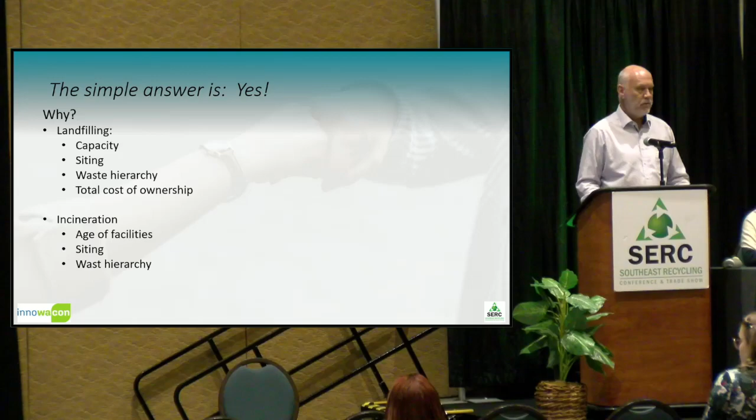Also the waste hierarchy, you don't want to incinerate if you can do other things with it, like recycle. And NIMBY, not in my backyard, everyone knows that. No one wants an incineration stack. And another acronym, I didn't put it on this slide, it's called NIMTOO. Do you know what that is? Well, that's for the politicians here. That's not in my term of office. I'm sure you can think what that really means.

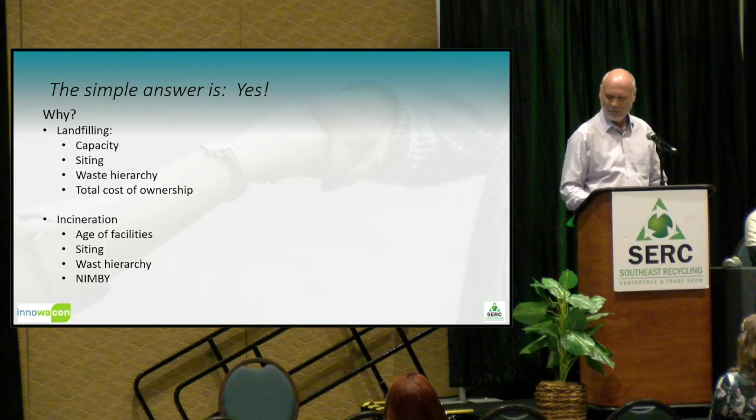Everyone's looking for a tried and proven alternative. The answer to this is you have to answer all these questions we were just asking before. What current sustainable future product is there that can take all this material and recycle it and convert it? What technologies are out there, available, working, tried and proven? We don't want any pie in the sky, great idea technology that might work, we think. That doesn't fly here. What do I do with my organics, my garbage, the waste, the nice juicy stuff?

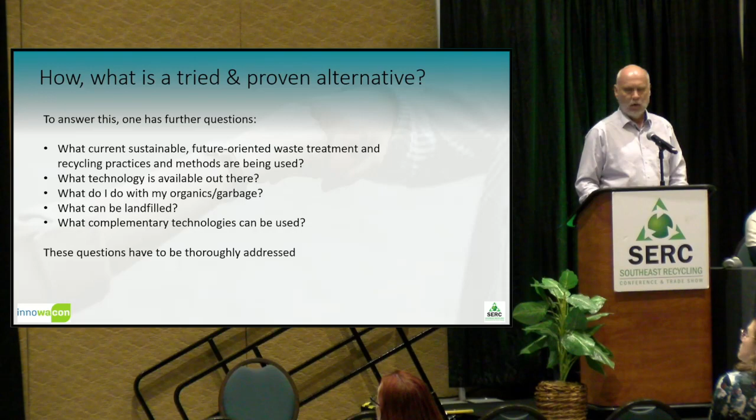What can be landfilled? And what complementary technologies can be used along with this technology? All these questions have to be thoroughly addressed. And ideally, you want a complete solution that'll take care of everything, combining the collection and waste and recycling centers together, when you do that all together, working with them, and a very sustainable waste process itself.

You just can't have something that's going to use up a whole lot of energy, a lot of space, emissions into the air, water, ground, etc. It has to recycle. You try to get the most energy, most recyclates out of the household waste, MSW, that is possible, and only dispose of certain things in a landfill that you can't do any other way. It should incorporate complementary technologies that could enhance it, and it should be BAT.

Who knows BAT? Best available technology. Should be that, not just state of the art. State of the art kind of stays along the timeline and doesn't follow. BAT always moves with the time. You're always adjusting, making the technology better as time goes on.

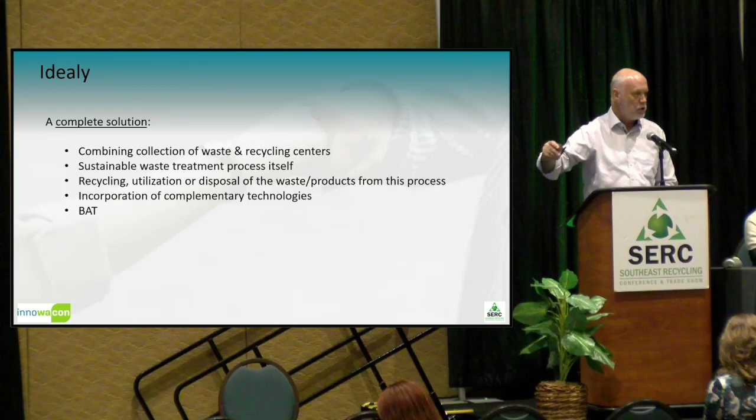One waste treatment solution is mechanical biological waste treatment. It has had in the past many challenges. Some people have tried it out with different processes. It just hasn't worked. I've seen it in Germany, or I've heard about it in Germany. There were two plants built with another process. Sadly, they failed miserably, and there were tens of millions of euros sunk in the ground, and they had to dismantle these plants because the process did not work.

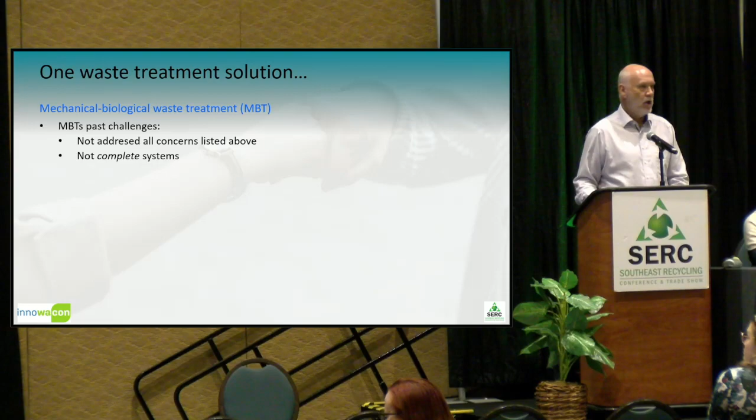They did not address all the concerns that were listed above. They were not complete systems. Some were difficult to control and maintain. As I said, the process just did not work correctly, and it was designed and built maybe just good enough to do the job.

You can't do that. Because if you're going to drive a nice car that's just good enough to ride on the highway, maybe at 50 miles an hour, but you want that one that goes 70 on the highways here, maybe 80, here in Florida, then you have to have something that's really sustainable and workable. And it has to extract the maximum amount of energy out of the material that you're giving it.

And some of these were absolutely not sustainable, resulting in unreliability of the whole plant, non-availability. It wasn't up there all the time and running for you. They're scrambling around trying to fix it. And facilities that could look like this.

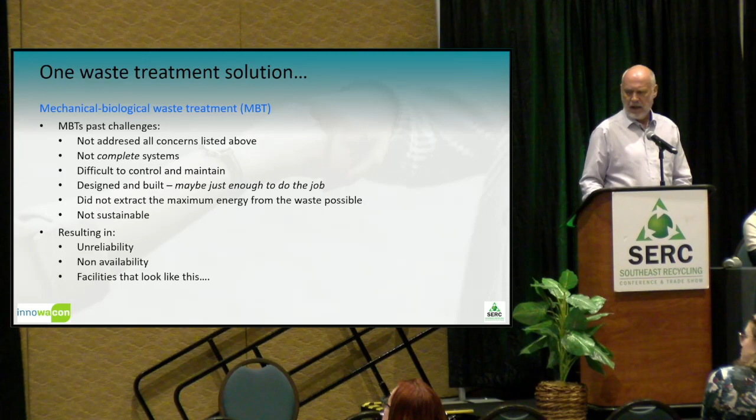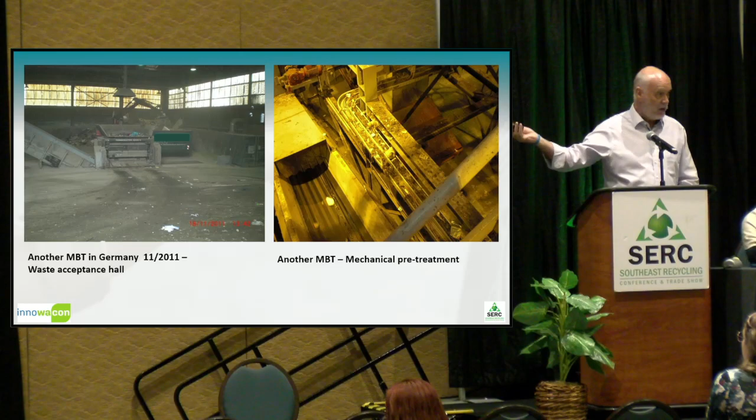That's a tipping hall, tipping floor in one place in Germany. This is in the mechanical processing side, and you will see here, these are cable channels, open cable channels. And what are you seeing in there? All sorts of dust, dirt, papers flying around, plastics flying around. Talk about a fire hazard. Cubed.

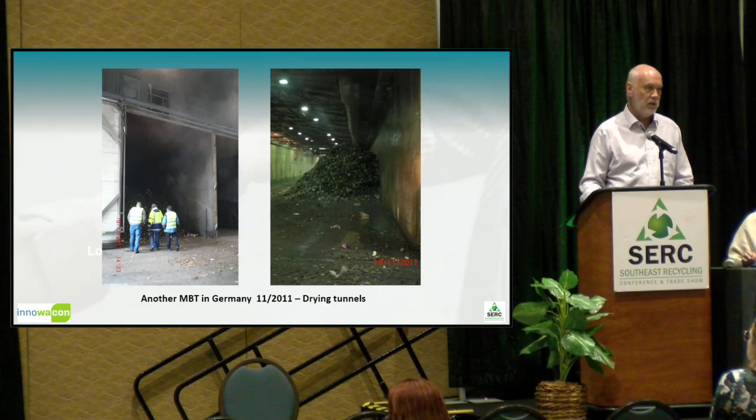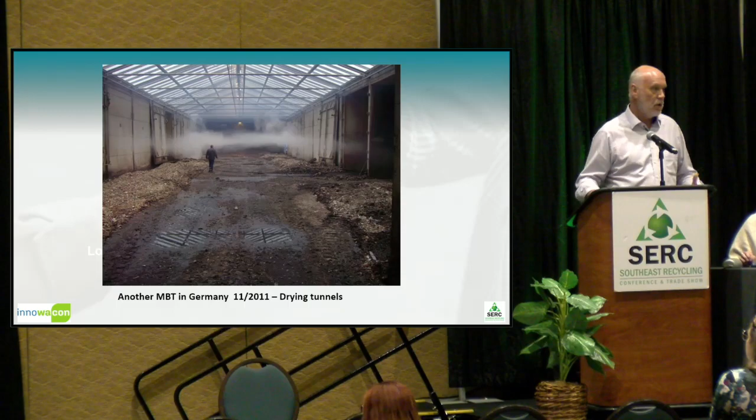You can see here the vapors. This is a real place where even some of these doors here are cracked open just because they're not working anymore. And material and machines and pumps and things are not situated correctly so you can get to them when you have to change them and fix them. And open storage of certain materials, this is environmentally not sound. Can't be done.

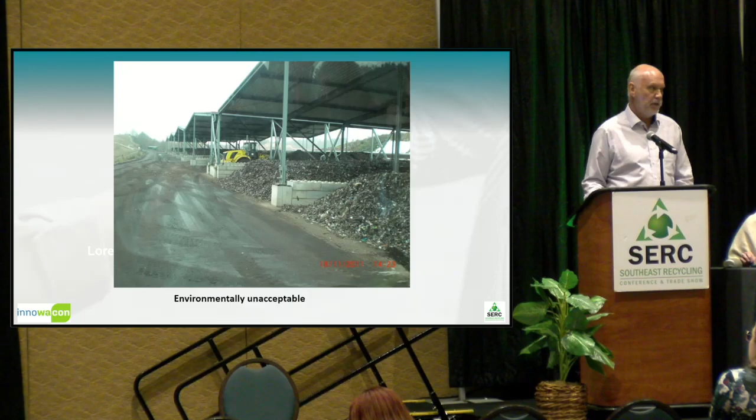So what we did was we created what's called Maximum Yield Technology, MYT, and it is sustainable. It is a tried and proven product. It is fully developed, fully designed. It is flexible with the different kinds of inputs and the outputs that you have. Mainly it takes MSW, municipal solid waste, with the organics.

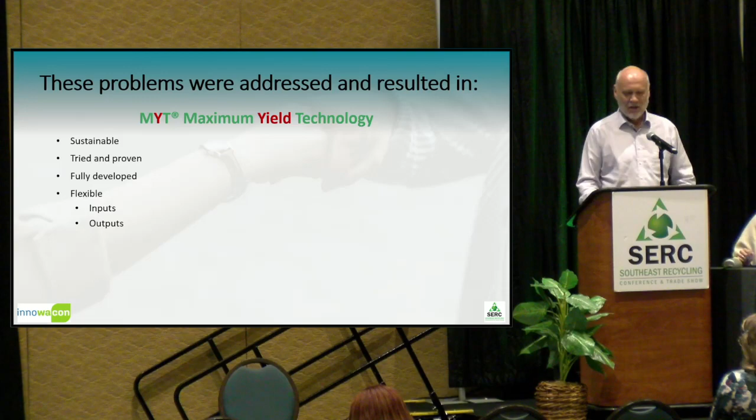Now, if anyone's here from California - the SB 1383 says you're supposed to divert organics from landfill, and one should separate it, but it does allow for you doing it in this way to keep the organics with the MSW because we need it in the process, and it is a very high diversion of organics from landfill, 99% maybe.

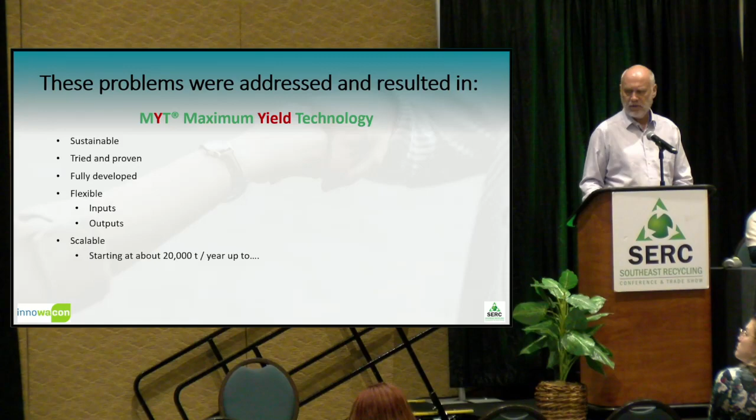It is scalable into different sizes. Lowest size is around 20,000 tons a year, and 500,000 tons is no trouble with that. And this technology is now also available in the US, in North America. It's a German technology available here.

We'll go into that. MYT is not a product, it's not a black box. Like this thing I have in my hand is a black box - has a certain thing to do, has a certain size, you can't change it unless you're a real electronics genius. You can't change it much.

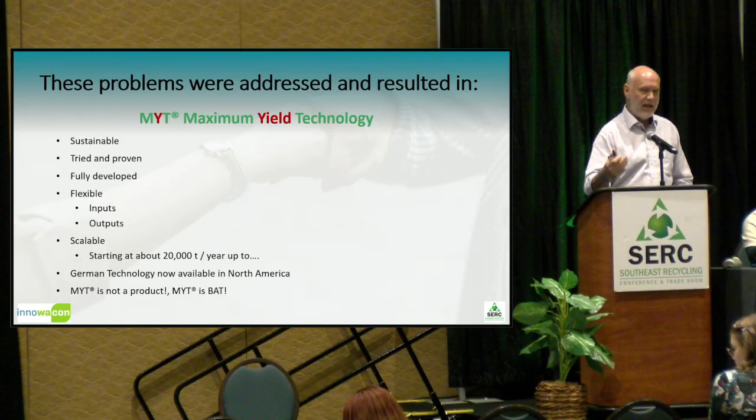MYT is a process which can be adjusted to the size, the amount of waste you have, and the kind of waste you have. You do a waste analysis up front to make sure what's coming in there - the whole machine, the whole plant and process, is designed for this waste.

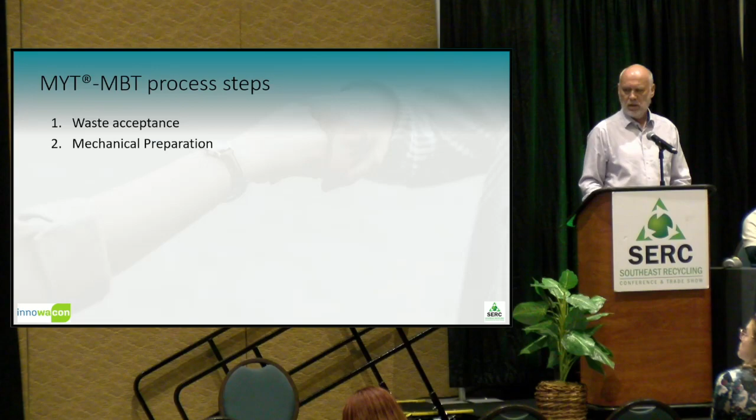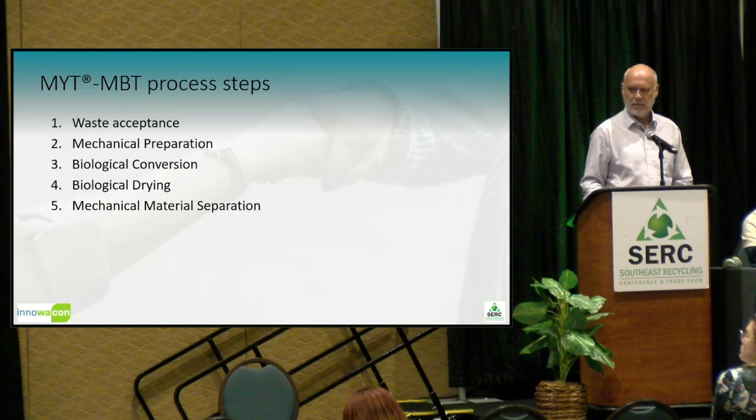The process steps are waste acceptance in the tipping hall, mechanical preparation, biological conversion, biological drying, mechanical material separation - just 5 steps. We won't go into these in depth right now, but if you look at it, the different 5 steps from left to right, it's like a good piece of prose. Anyone who's a writer and does different paragraphs, you know the last sentence of one paragraph leads into the next paragraph. It's just like this. Each step prepares the next step for what it's supposed to do correctly.

It's a different process in here because the whole thing is mechanical, biological - yes, there's some chemicals - thermal process. It all works together, that it has to work. You have to know the process, but it's not rocket science. You don't have to be a super PhD to run this. You have to know the process, though, what's going on. And we make RDF and biogas out of it. I'll talk a little bit about that later.

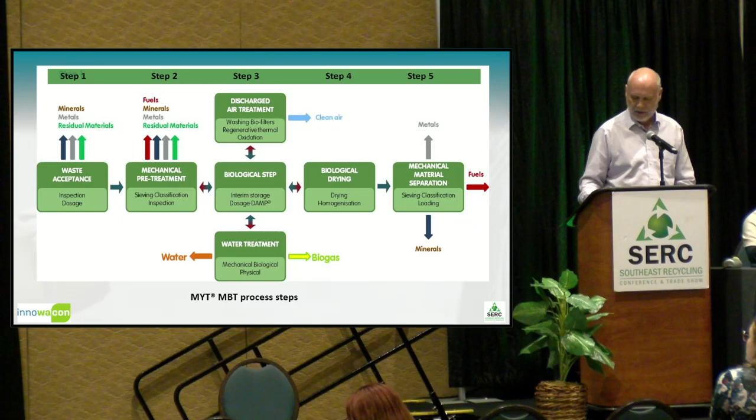At ZAK, at the Zweckverband in Ringsheim, Germany, at that one plant, we do not have that bio bin. The bio waste, or organic waste - they call it the bio bin there - is part of the recycling, part of the black bin, where they only have to pick up that one black bin at your house, along with the other things.

It saves one more cart having to be picked up, and as you've probably heard from SWANA, the Solid Waste Association of North America, the waste collection industry is one of the 6 most dangerous jobs in the US right now, sadly. It could be better. So if you keep one less truck on the road, there's a reduction in possible accidents that can happen.

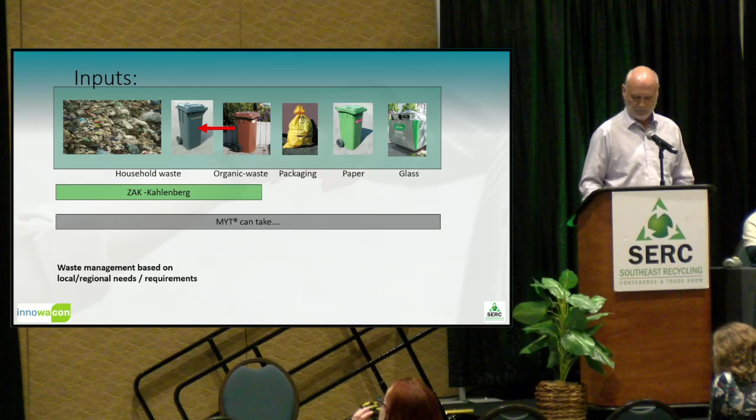Hall 2, the mechanical pre-treatment, really looks like this. The floors in Halls 2 through 5 are kept as clean as this floor, every day, all the time.

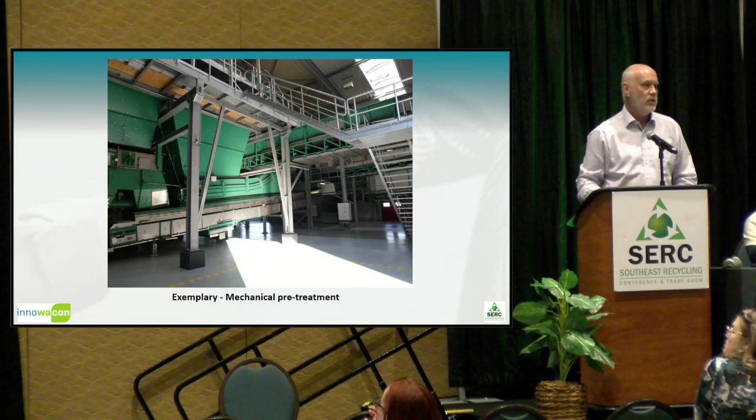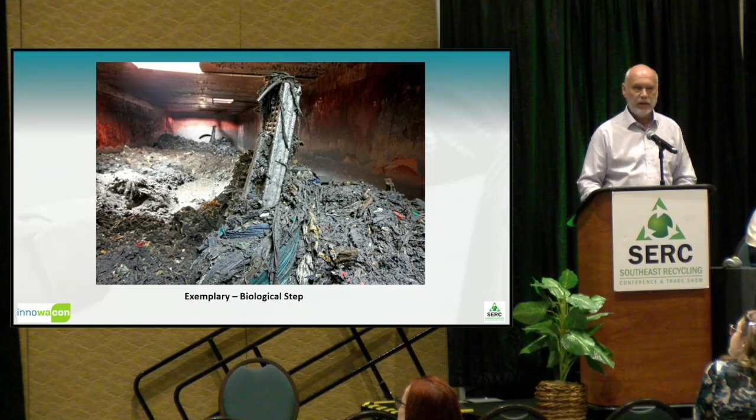This is the biological step, in these large tunnels, where we mix the waste that's come through the previous step with processed water - not fresh water, so Californians would like that, since you're not using a lot of fresh water, which they don't have anyway, sadly. Using the processed water here creates a slurry, which then goes to a press, and the solids go to the biological drying step, which consists of large tunnels.

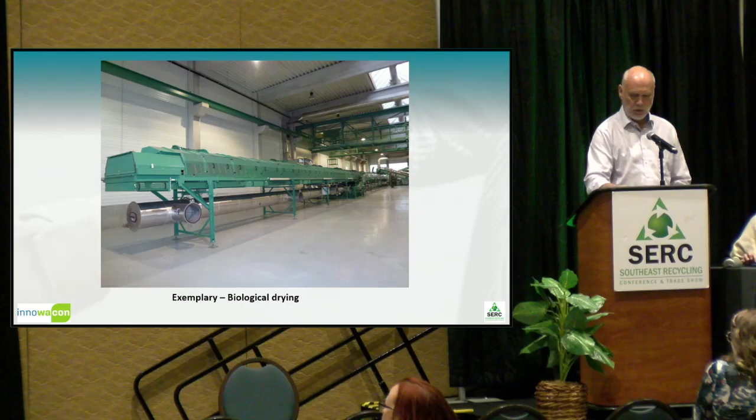These tunnels are about 30 meters long, 5 meters wide, and 5 meters high, and we pump air through them, like the building air in here. Because there's still organic material and water in it, it starts to heat up, decompose, and dry off. We suction off that air, turn the material over once into another tunnel, so after 2 times 4 days - not weeks or months, 2 times 4 days - we bring the moisture content of this material from about 45% down to a maximum of 10%. So it ends up a little drier than newspaper that's been sitting outside in the Florida air overnight.

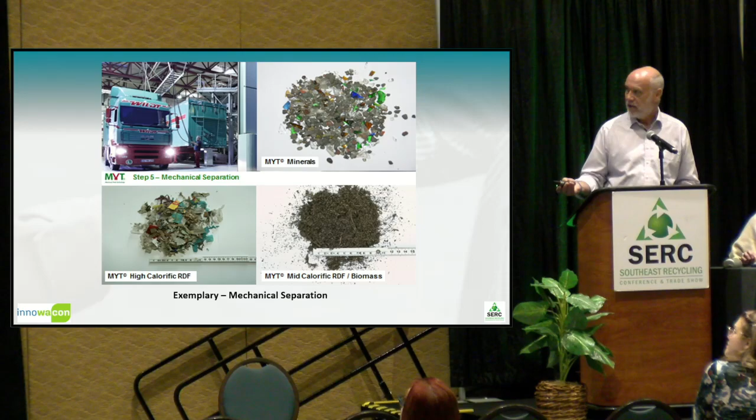This is what some of the outputs from step 5 look like. We have minerals or inert materials here, and different sized RDF with high and mid calorific value. We can size it the way you need.

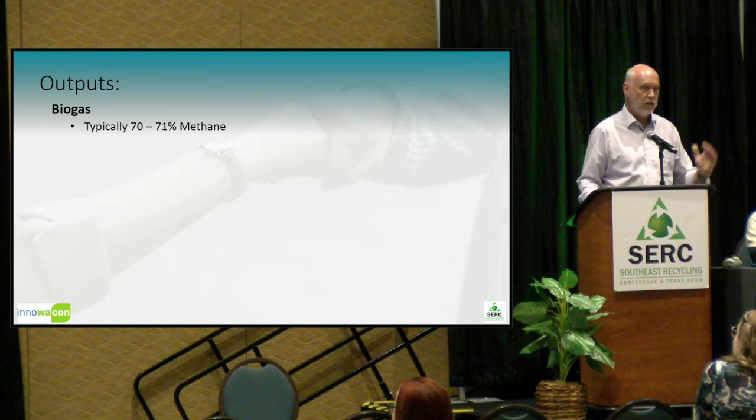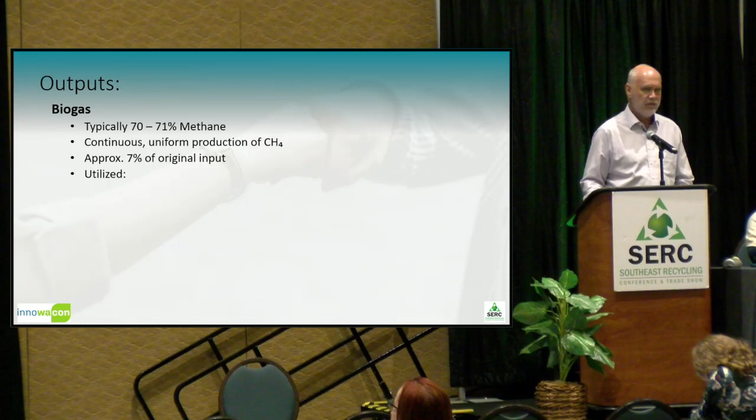The other output is biogas, typically 70 to 71% methane content all the time - not fluctuating much - and it's continuous, uniform production of methane. It's approximately 7% of the original input weight that is produced. This plant in Germany processes 100,000 tons a year, and we produce around 7,000 metric tons of biogas, converted into norm cubic meters or whatever units you'd like to use. So it's about 7%, when utilized correctly.

It can be converted to RNG, renewable natural gas. It can be converted to diesel fuels - we've heard that also today. It can be converted to green hydrogen. Some might say gray hydrogen - we can discuss that later on.

And it can be used thermally for creating electricity and heat, which they do at the ZAK plant in Germany, and also converted to a cryptocurrency.

How's that work? I heard this at a biomass conference just last year. If you take excess energy, for example from wind turbines, or if you don't have an RNG pipeline close by to such a plant, instead of just letting that excess energy go, or not using the wind turbine if it's turning at night and FPL or Duke Energy doesn't need it, you can put it into these server boxes and they will supply the servers with power so they can mine cryptocurrency, using surplus energy not from the grid.

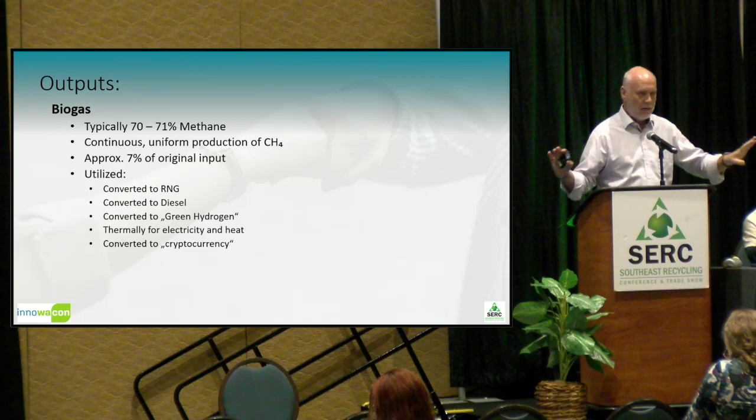Interesting idea. Whether cryptocurrency is something we all want to go with, I'm not going to touch that can of worms. The outputs also include RDF, refuse-derived fuels, very dry, always 90% dry.

High calorific values, it's size dependent. The larger the size, the more plastics there are in there, the higher the calorific value. Somewhere between 9 and 22,000 kilojoules per kilogram, or about 3,900 to 9,500 BTU per pound. Someone correct me if I'm wrong on that.

It can be utilized as a renewable resource, making it from MSW. It can be changed to chemicals, in RDF-to-methanol processes. We heard the name Enerkem before. They could use it. It can be burned as well.

In the cement industry, direct in the kiln of a cement kiln factory, to give them extra heat, using alternative fuels, and they like it because the chlorine content is less than 1%, usually around 0.5 to 0.65, depending on your input materials.

Used in power plants, can be co-burned with coal. As I said before with NIMBY, coal burning is going down in the US, which is probably a good idea anyway.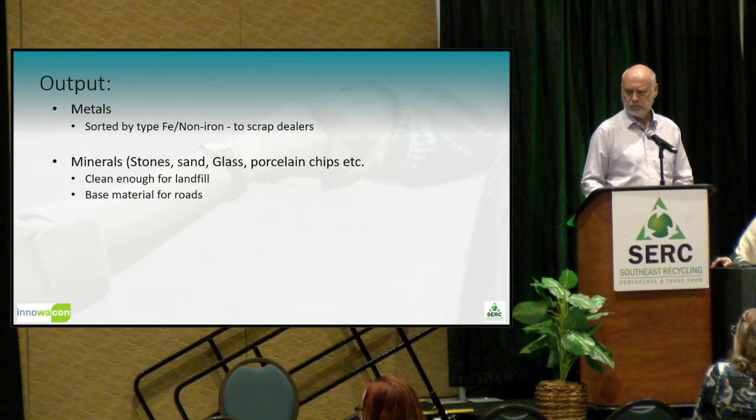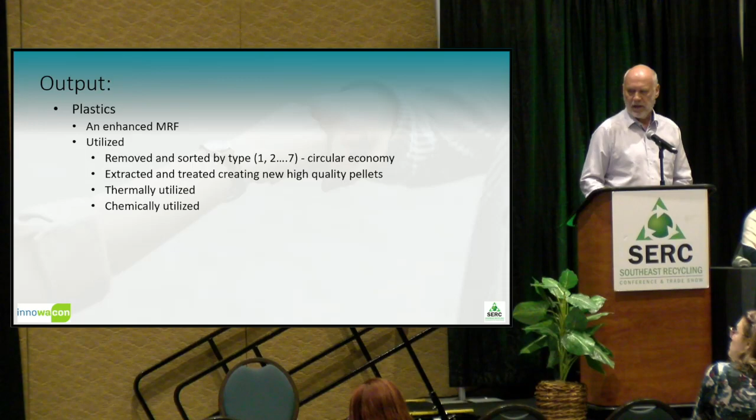Use the plastics. It is an enhanced MRF. It can be utilized, removed, and sorted by type—1, 2, 3, or 4—or extracted and used in other high-quality pellets and other things we've heard about today already. Thermally utilized, chemical conversion. Unsorted can be used as a concrete filler, something interesting as well.

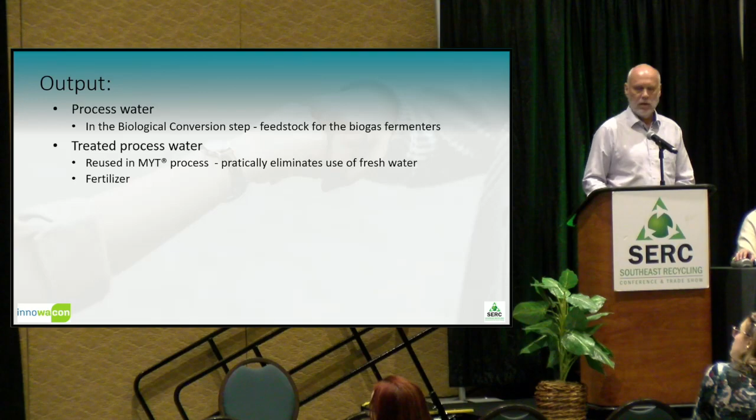Processed water coming out of it is used in a conversion step. Treated processed water is used there and can also be brought into the local sewage treatment plant, eliminating use of fresh water, possibly as a fertilizer, maybe in arid regions where you want to enhance the ground—but I don't really want to put that stuff on my tomatoes at home.

And it's clean enough for the local sewage treatment plant. They want to know that they're going to be getting that stuff, but they can clean it well enough. It can also be used in chemical, RDF-to-methanol processes. For example, Enerkem could use it there.

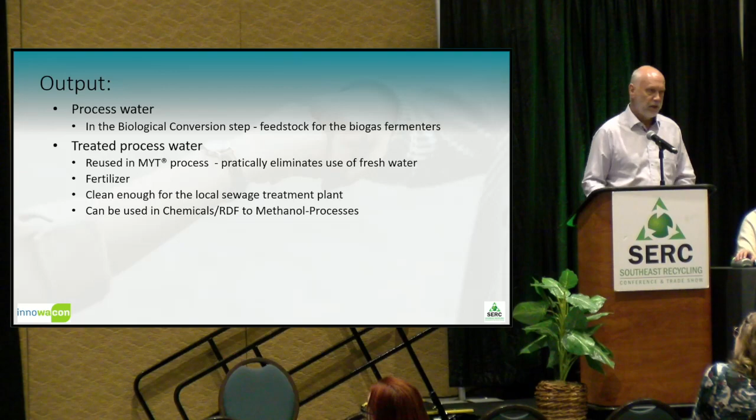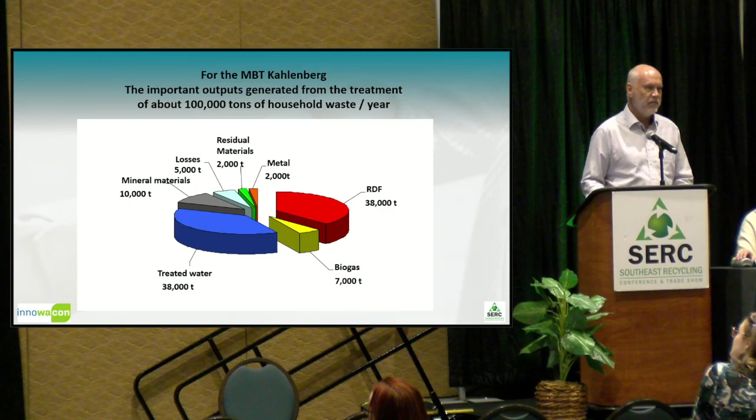Because of time, we can't get into this too deeply, but the RDF output is around 38%, biogas around 7%. Cost to a citizen.

A 4-person household in the Ortenau County in Germany spends only 91 euros, or about $110 a year, for the complete process.

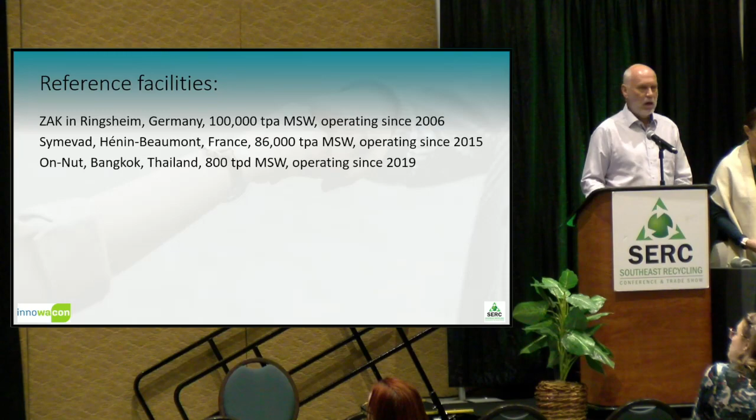There are reference facilities—the one in Germany, one in France in Hénin-Beaumont, a 300,000-ton facility in Bangkok, Thailand, and a few other smaller ones. And we're looking to bring more into the States, into North America and Canada.

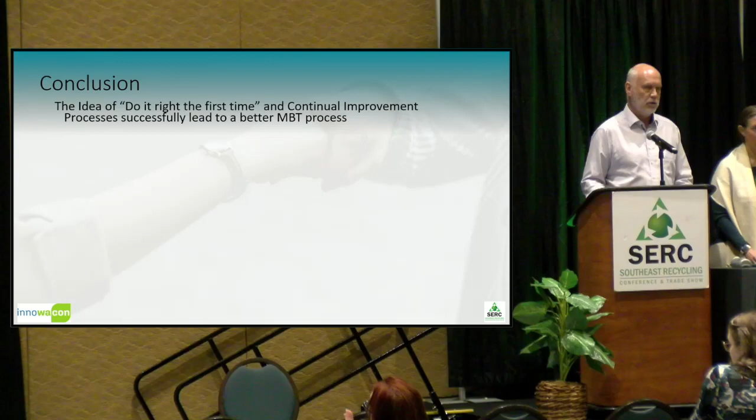So you may not want to leave.